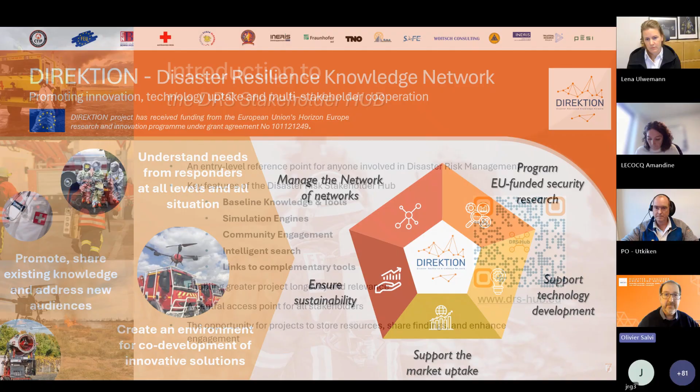This webinar is also organized in the framework of the Disaster Risk Stakeholder Hub, which is an initiative that consolidates results from different projects in the field of disaster risk management. You can access this platform with this QR code and this web address.

So the idea of this DRS Hub is not only to deal with different projects, but to behave as a cluster and to facilitate the interaction between different projects, to develop synergies and to enable cross-learning and cross-innovation between the different projects.

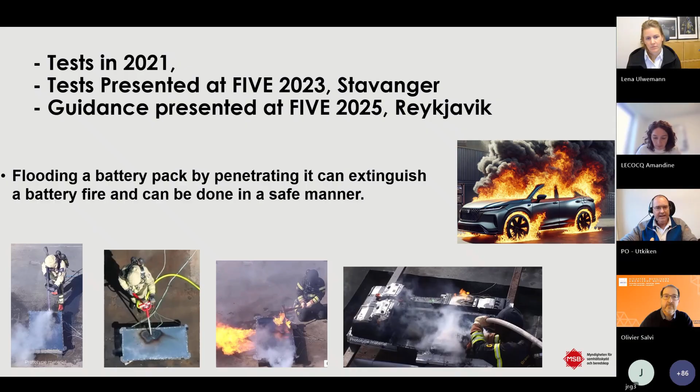Here is the key to what we are talking about. If you look at this, you see thermal runaway for a couple of seconds, and then it's a regular fire. During this process, we heat the adjacent cells. By getting water into the battery pack, we cool the cells that are on fire with thermal runaway or fire afterwards, and we cool the adjacent cells. So that is basically the key: get water inside and then cool as much as we can.

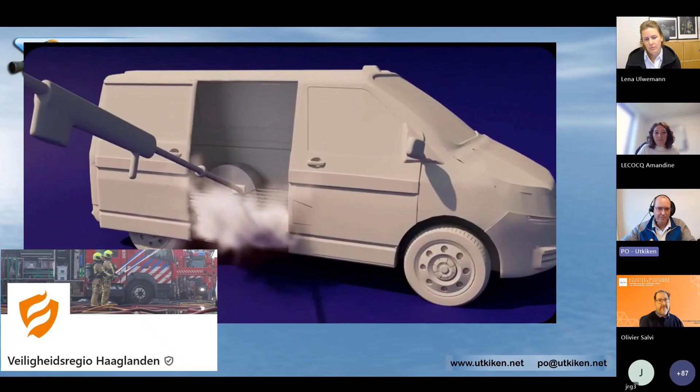This is a clip from a Netherlands fire brigade which illustrates it very well. If we spray water into the battery pack and cut a hole in it, we might start new thermal runaways, like the last red cell you saw there. But since we are at the same time getting water into the battery pack, we are cooling the other cells. So it doesn't really matter that we get a new thermal runaway or several new ones, because the water will do what it's designed for.

After our test, we have seen tests in the Netherlands last year that were successful. The NIPV did some testing there, burned two EVs, and in both cases it was a success. And in France in June, we saw SDIS 91 do their testing, also successful. So we're starting to get evidence that this works, and it will also keep the batteries extinguished most of the time. We don't have immediate reignitions. There are certain times in the process where it's more likely, but overall it's been working very well.

In Sweden, we have some real-world operations. Here we had a vehicle with a thermal runaway in the battery pack, extinguished with a fog nail - I'm going to get back to that. The second one was a vehicle put out with a cutting extinguisher, and then we had an electric bus that was also put out with a fog nail. Talking from the MSB perspective, the Swedish Civil Contingencies Agency, the fog nail is not a recommended tool, so this was done not following the recommendations. But what we saw was that we got water inside the battery pack and it worked.

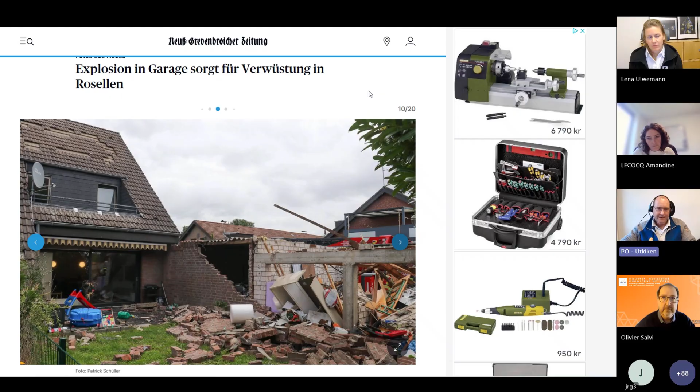Then I'm going to talk a little bit about explosions, because I think that's the largest hazard we have to navigate through or around. We have all seen those pictures. This was an explosion in a vehicle where the garage roof was blown away, the walls were blown away. Then we have different levels of this. This is also something you've all seen, the Jeep on the fire station that blew the roof up in the air due to a gas explosion.

What this gives us is that we have to navigate all those different events. It's not always super dangerous, and we can have a fire in a battery pack where we have the white gases, the smoke as I call it, but we might be able to do something about it. Our thoughts here is to handle it like a gas leak. If you have a flaming thermal runaway, then it's much better from an explosion perspective than if you have a smoking thermal runaway. And the firefighters have a lot of tools already in the toolbox if we think of it as a gas leak of a combustible gas.

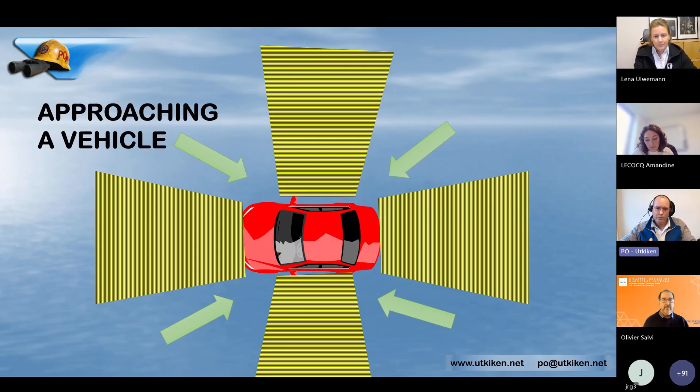The other example is this one that I just showed you from Sweden, where they used a tool to break the window, wait for a while, because that seems to be like with a regular backdraft, that it takes a while for the oxygen to get into the compartment, and then we have the ignition.

And if we now want to get water into the battery pack, when can we expect a result? Because that will also vary. It will vary because of the tilt angle of the vehicle, if we are in the correct compartment, because we can have vehicles with several compartments, and there the rescue sheets are very valuable. And if we have large holes in the bottom of the battery pack, like Tesla for example, where their battery pack bottoms can burn away, if we have that kind of construction, then this method will not work.

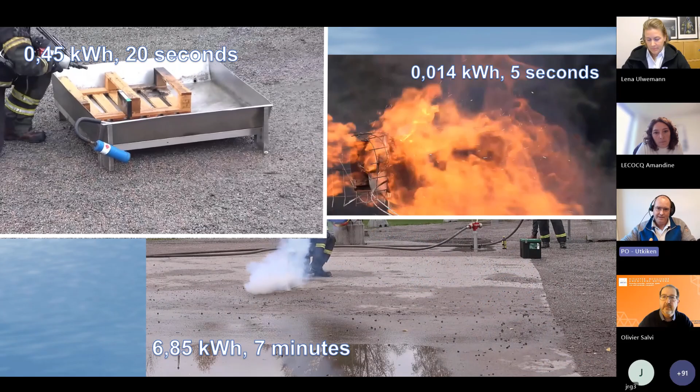So we need to be aware that it's not a single solution for everything. Also, cell and module size matters. This is what I'm talking about here. We have 3 different sizes. The smallest size, they have a thermal runaway for 5 seconds. So if I get water inside the battery pack, it will be very fast for the cooling to work.

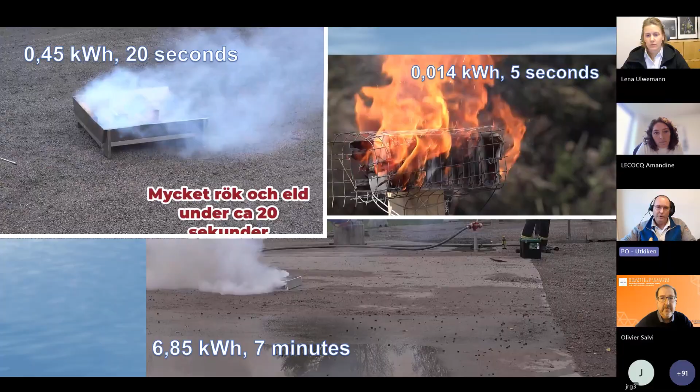The upper left, we have a 0.45 kilowatt hour battery cell, and that thermal runaway will go for 20 seconds. And in the bottom, we have a Volkswagen battery module with pouch cells, which will go through the module for 7 minutes. Since we are talking about cooling the adjacent cells, we can't expect a result from the cooling until we have the original thermal runaway burned through.

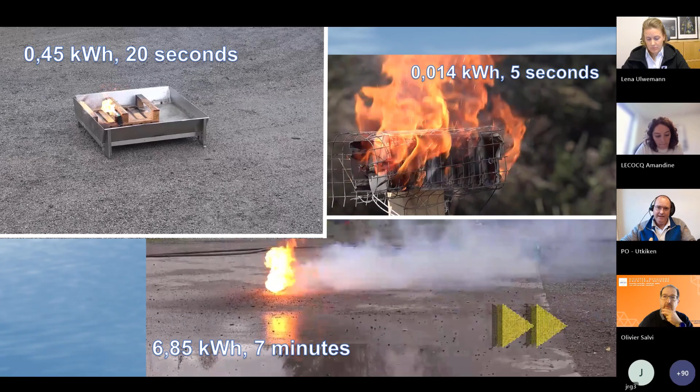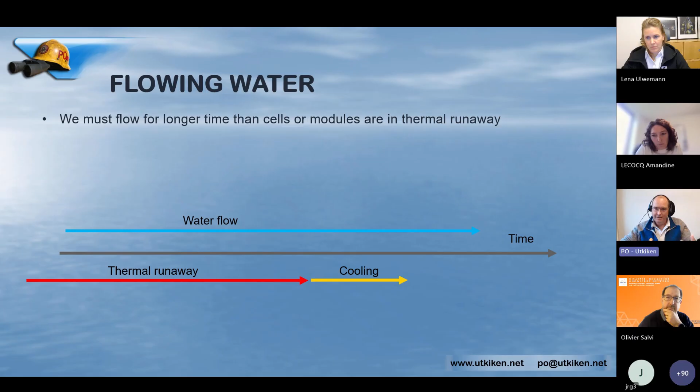And what that gives us is a timeline for how we must flow water. So we must flow water long enough to stop the thermal runaway. We need additional cooling time and some extra time. This, I think, can be frustrating for the firefighters, because we can stand spraying water for like 7, 8, 9 minutes, and we don't see any results because the thermal runaway is still going on in the original cell. But then we need to be patient with it.

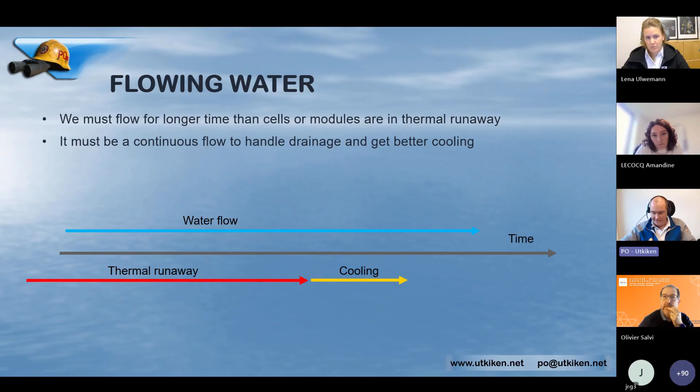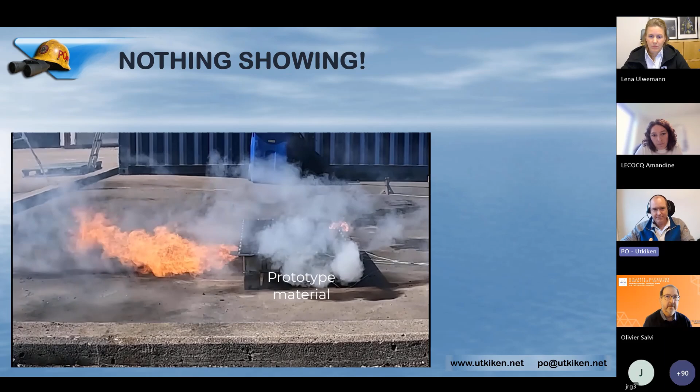And finally, I would like to show this video here. If this is what we have when the caller calls to the dispatch center, they say we have lots of flames, we have a lot of smoke. Battery packs today are very well designed. They are designed not to burn and to have a slow fire spread. This means that what we're looking at now could be what the fire service sees when they arrive, and that is nothing. So we need to be aware of that and use that time wisely to prepare for what could happen when we start to get this fire again.

And also talking about good design, they are designed to be able to handle a single thermal runaway, and sometimes that works. If that is the case, then we should not make any holes in the battery pack, because then we have a self-contained battery pack fire.

And with that, I would like to go to my last picture. Let me see if I can do that here. Here we go. So that was what I was going to talk about today.

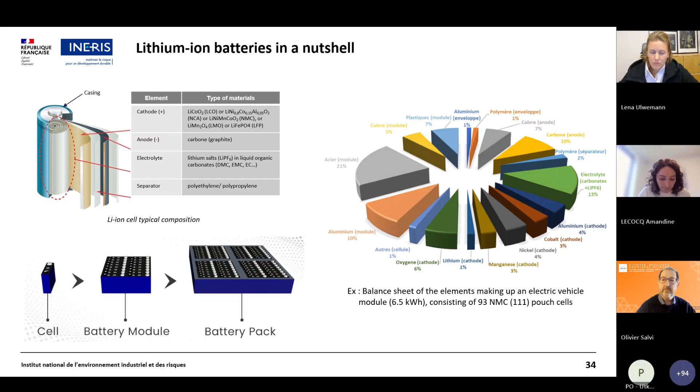As you know, lithium-ion batteries are prone to thermal runaway phenomena. This thermal runaway can occur when the battery is subjected to external aggressions such as mechanical, electrical, dysfunctional, or thermal aggression. It can also occur due to internal factors such as manufacturing or design defects.

The thermal runaway of one cell can propagate to adjacent cells, to the complete module, complete pack or rack, or even to the complete vehicle or complete system.

Different effects can occur during thermal runaway. It can lead to gas and particle release, fire, explosion, as was shown by PO, as well as projections of incandescent materials or small cells.

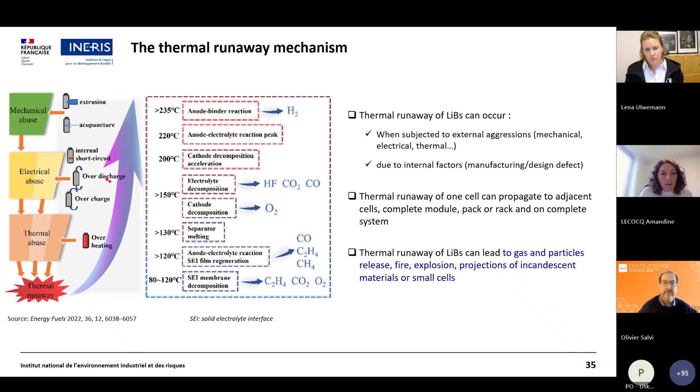In some specific cases, projections can also occur, also called the missile effect. These projections are mainly seen during fires in storage or recycling plants, or in some specific cases of violent crashes of electric vehicles. It's mainly due to the small cells present in these types of packs on different vehicles or in bulk storage.

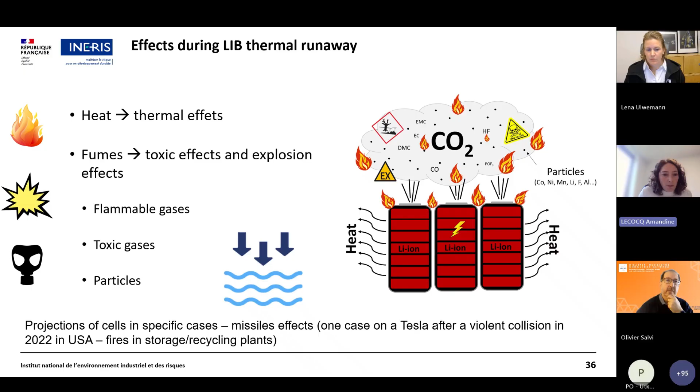Lithium-ion batteries are involved in many accidents and applications, from the smallest like smartphones or scooters, through medium like cars, to the largest like battery energy storage systems, BESS, and recycling facilities. Here are some examples and pictures of accidents that occurred across these many applications.

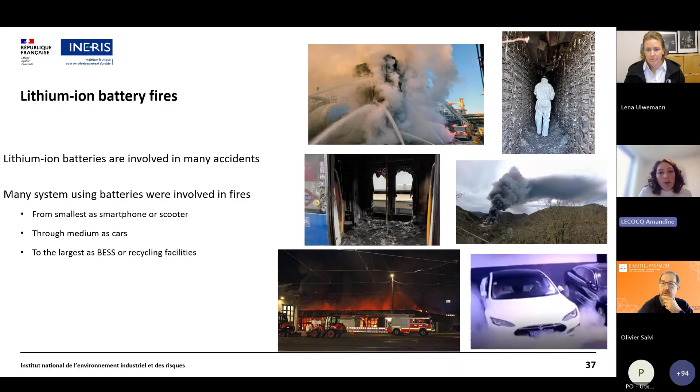Here is an example of an accident that occurred on a BESS in the south of France in 2020. It was a mixed electrochemistry of lithium iron phosphate and supercapacitor. It was a new container being put into service. A fire occurred in a BESS container that contained batteries, and the difficulty in this case was that these BESS containers were stacked.

There was a stacking of this container above another one, which posed difficulty of access for firefighting services. Also, at this site there was a lack of nearby water points, so it was difficult to extinguish the fire. The container was equipped with an extinguishing agent based on phosphate salt, but it was inefficient to tackle the fire.

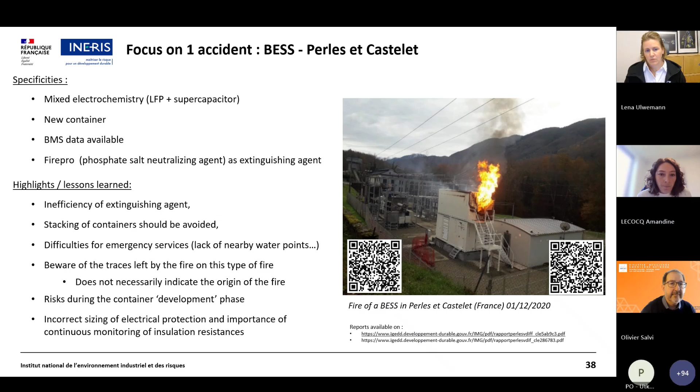So at Ineris, we have different safety platforms to characterize lithium-ion battery thermal runaway.

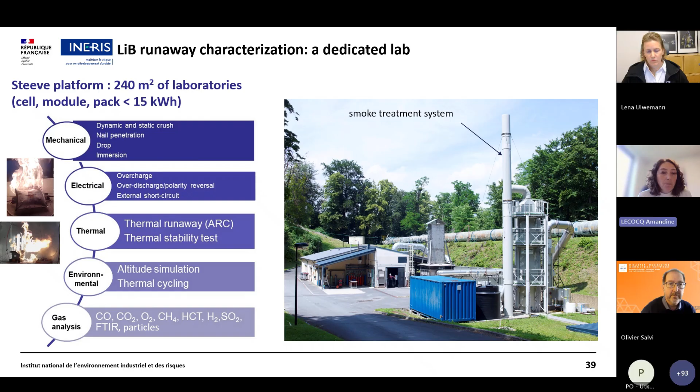Here is the first platform, called the Steeve platform. In this platform, we can perform different types of tests: mechanical abuse test, electrical abuse test, and thermal stability test on batteries.

to characterize the effects and also to analyze the gases emitted during the abuse test, as well as particle analysis. The second platform is the fire platform, used also to perform fire tests, but also mechanical and electrical

tests on larger batteries, since the test chamber is of higher size. For example, we have a very large fire safety chamber of 1,000 cubic meters that is used to perform tests at pack level, electric vehicle level, and also system level.

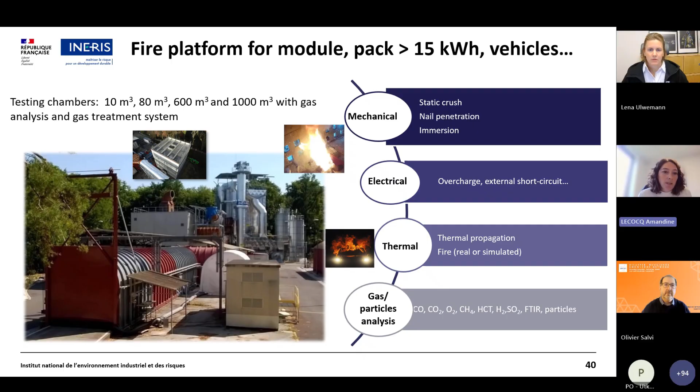And in this platform, gas analysis and particle analysis are also performed. So we have different types of measurements, such as physical measurements, gas generation characterization, and online gas composition measurements, including smoke and particles. We also perform water sampling and composition analysis. So I will show you some examples of results we have.

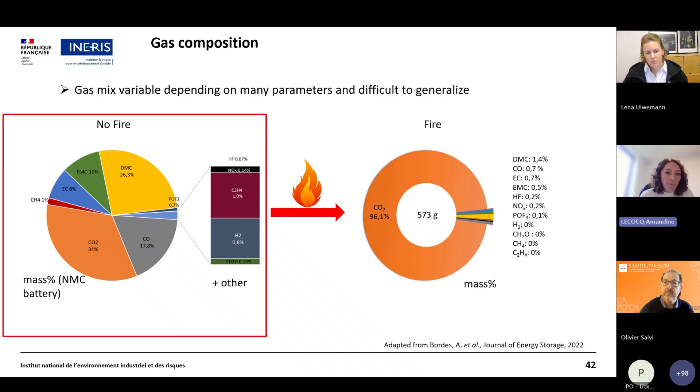Here is the gas composition of two cases. On the right is the typical composition of a battery fire when we have little fume generation, so it's mainly fire. In this case, the main gas produced is CO2, at more than 90%. On the left is a case where we have only fumes, and you can see that the composition is completely different, with a lower amount of CO2 and a higher amount of flammable gases, as represented in this graph.

In the case of fumes, we have highly flammable gases such as hydrogen, methane, and ethylene. Also both toxic and flammable gases such as carbon monoxide and carbonates, which are the solvents used in the battery. And also highly toxic gases such as formaldehyde and HF, and in some cases POF3, which is also toxic.

In this table is the report of the explosivity limit of the flammable gases and the toxicity threshold of toxic gases we can find in the fumes during thermal runaway of a lithium-ion battery.

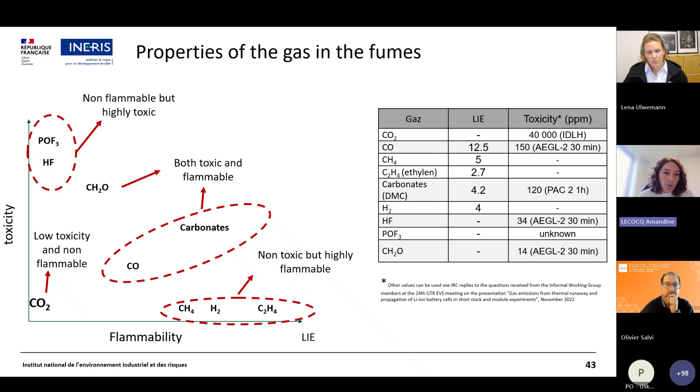The combustion is higher with NMC chemistry, so we have a higher amount of CO2 and CO.

Whereas with LFP, it's mainly vaporization of the solvent that is in the battery, so a higher amount of solvent, namely carbonates, are found in the fumes. So there is less combustion, and also fluorinated species are quantified in a higher amount for LFP, because in LFP there is generally a higher quantity of electrolyte, so more salts that decompose into HF.

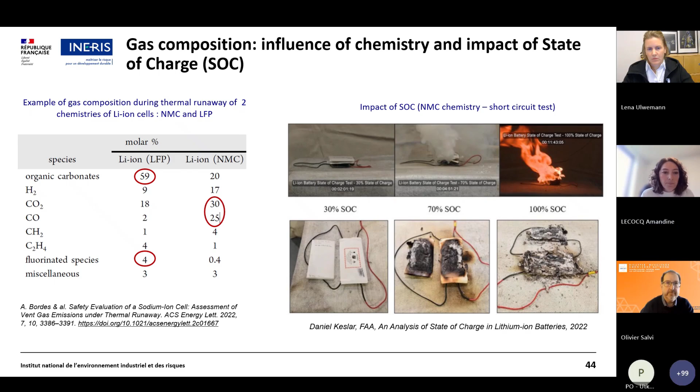So now let's talk about explosion risk. Under certain conditions, for example in underground car parks or garages, accumulation of gases emitted by the thermal runaway of the battery can generate an explosive atmosphere that can lead to an explosion.

Here is a short video showing that an explosion can occur in a garage. It was a hybrid vehicle, and it can be violent in some cases. This explosion can also occur with a small number of lithium-ion cells in thermal runaway condition, and of course it depends on the environment and so on.

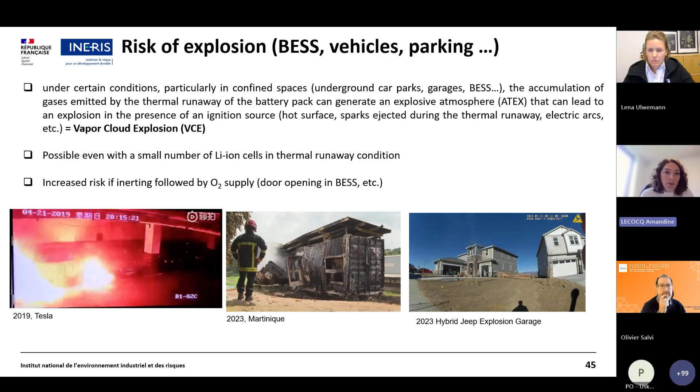Here is another example. One in the center of the picture is an explosion that occurred in a BESS, and on the left is a Tesla, which just shows fumes that rapidly ignite and go on to fire.

So the risk of explosion needs to be taken into account during the extinguishing process. This is the Jeep video already shown by Perola, just to show you that water-based agents may extinguish the flames, reducing the thermal effects, but extinguishing the flames does not mean that the thermal runaway reaction has stopped.

The thermal runaway reaction continues, and flammable gases can be produced, as I've shown you just before. So the risk of an explosion is present and needs to be taken into account. The risk shifts from thermal to explosion.

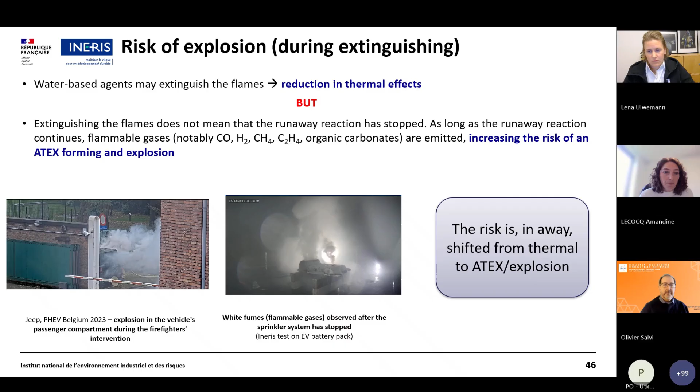So regarding particles emitted in the fumes, the particles are also variable and the nature depends on battery chemistry. The particles can be found in the smoke, but also near the scene of the incident, around the vehicles, or inside the container for BESS applications. And the particulate emissions significantly differ from combustion engine vehicles.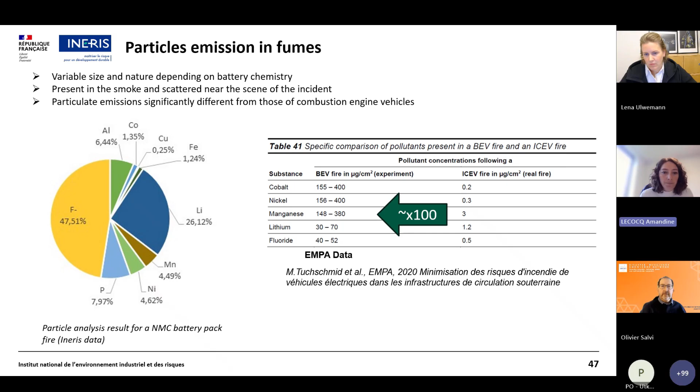Here are some samples taken from firefighters' clothing before and after an extinguishing test performed at Ineris on an EV battery pack. The lighter bars on the histogram correspond to samples taken before the test, and the darker bars to samples taken after the test. Red colors correspond to sampling on the jacket, and blue on the trousers.

It can be seen that contamination of firefighters' clothing is observed with metals, the same as found in particles: lithium, aluminium, manganese, cobalt, nickel, and also copper in this case. Fluoride compounds are also detected on the firefighters' clothing, in higher quantity on the upper part, the jacket, compared to the trousers. This means decontamination of the clothing needs to be taken into account and is recommended after responding to lithium-ion battery fires.

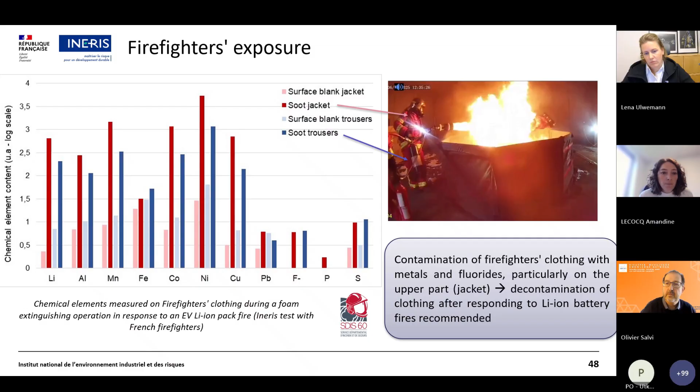Regarding water runoff contamination, there are different strategies to tackle a fire. The first one is external cooling and smoke abatement of the fumes. In this case, the water runoff has shown some contamination with cobalt, manganese, nickel, and lithium, as shown in the water runoff composition after intervention.

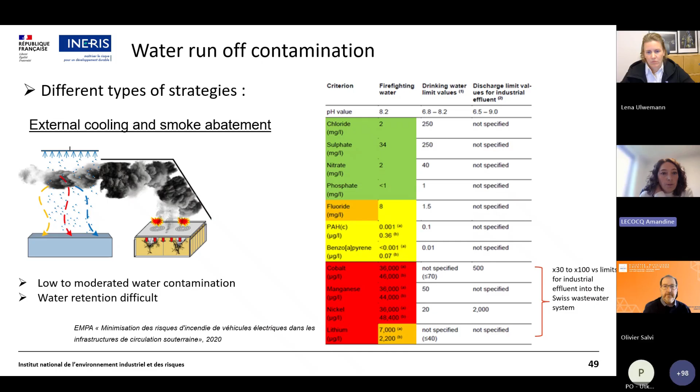The other possibility is battery immersion or electric vehicle immersion. In this case, the same components are found in the water.

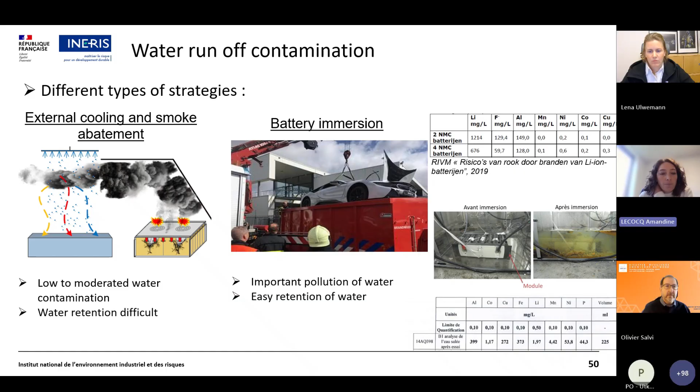The last one we studied is direct contact of water, where water is directly applied to the battery fire. Here are the results of some analysis we performed recently on this water after testing. Different types of tests were done. A sprinkler test, where we set a fire on a lithium-ion battery pack and triggered the sprinkler system on it.

We also performed a medium density foam test, shown in the picture two slides before with the firefighting intervention, and the last one, in green, is a high density foam test. We analyzed this water, and you can see that it is contaminated with metals: nickel, manganese, cobalt, lithium, aluminium, and also the presence of fluoride.

For the foam tests, we observed the presence of sodium and sulfur at a higher quantity for one of them, coming from emulsifiers used in the test. So it's necessary to take into account the potential risk to the environment from water runoff in lithium-ion battery fires. In some cases, we can also quantify organic carbonates in the water. It was not the case in this last test, but we observed this in a previous test.

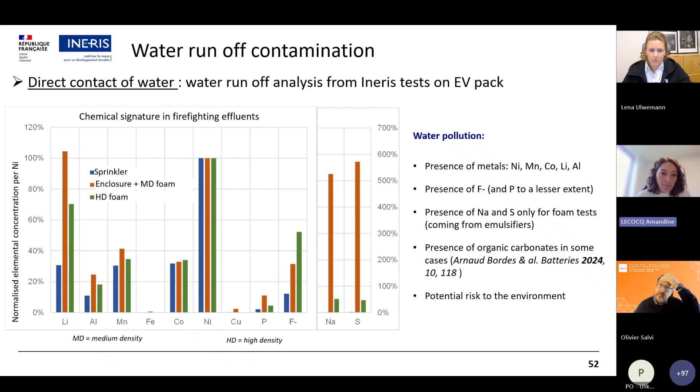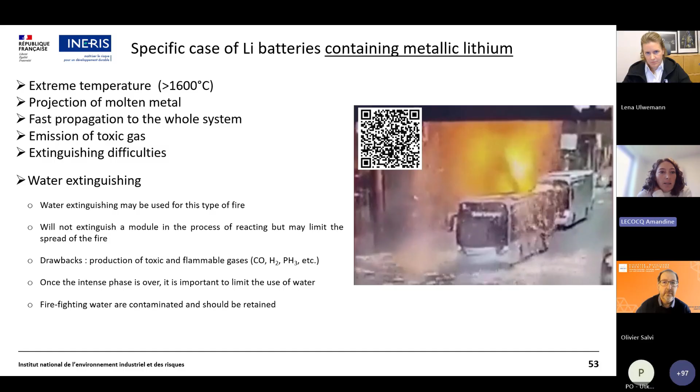So here is another case. Before, I talked about lithium-ion batteries, but there exists another type of battery that contains lithium metal - not lithium-ion batteries, but lithium metal polymer batteries, or batteries containing lithium metal. It's a different technology, and in this case the reaction is a little different, with higher temperatures reached, superior to 1600 degrees C. We'll see in this video the projection of molten metal and a fast propagation to the whole system.

This was an electric bus in Paris, and here it's a lithium metal polymer battery. You can see the projection of lithium metal at several meters from the bus, with very high and hot flames.

So here it's a complete fire of the bus. In this case, it's really a fast combustion, and it can pose some difficulties to extinguish.

However, we performed some tests at INERIS on this technology. These tests have shown that water may be used for this type of fire, but it didn't extinguish the module under thermal runaway. It can just limit the spread of the fire, but it produced toxic and flammable gases. In this case, we observed a phosphine emission during the extinguishing of the fire, which is highly toxic. So it's important to limit the use of water on this type of technology.

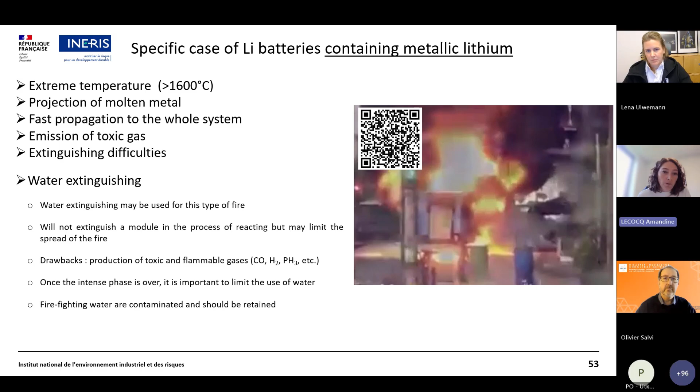So to conclude, regarding lithium-ion batteries, during thermal runaway, fumes contain both toxic gas and particles. Fumes might be flammable and also contain HF.

During extinguishing process, be careful of the shift from thermal to explosion risk. The clothing of firefighters can be contaminated by chemical elements specific to batteries, such as heavy metals and fluoride. And runoff water can be contaminated with metals and electrolyte solvents. So retention is recommended.

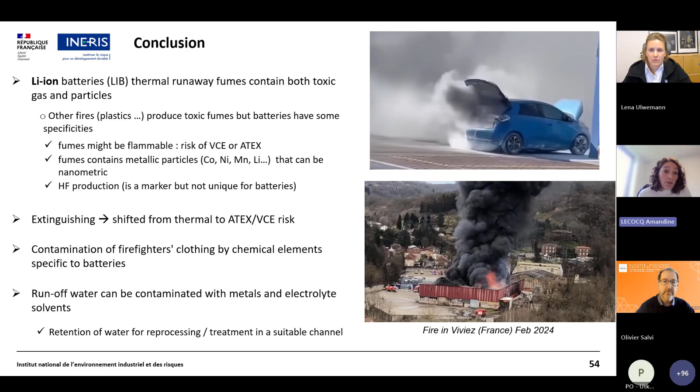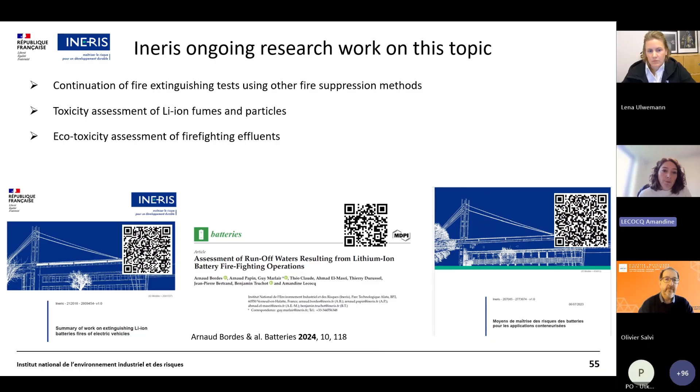So here is just an overview of ongoing research on this topic. We continue at INERIS to perform some extinguishing tests with other fire suppression methods, and to go deeper into the toxicity assessment of lithium-ion fumes, particles, and ecotoxicity assessment of firefighting effluents. Here are just some reports that can be useful to read. Thank you for your attention.

Thank you very much, Amandine. This has been again very informative, and we better understand that the chemistry of the battery is very important. And depending on the type of battery, there are different types of gas that could be emitted and different kinds of particles.

And also an important aspect is the quantification of the contamination on the garments, on the equipment of the firefighters. I think this is a topic that requires a lot of attention in the future. The cleaning is always a challenge, but it's really important in that case to pay even more attention because of the contamination with heavy metals. So thank you very much.

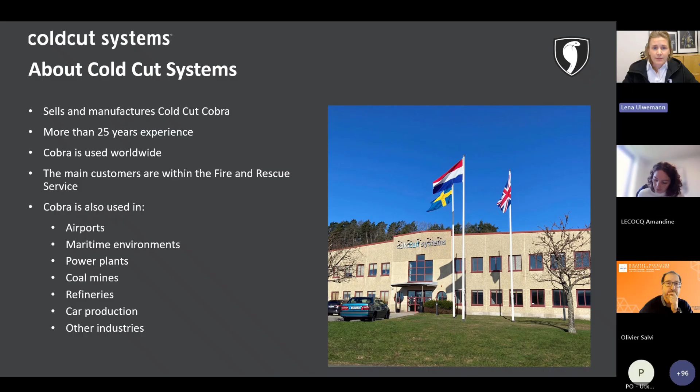So Cobra lets firefighters cool the hot fire gases from a safer position outside the fire compartment. It does so by using an ultra-high pressure water jet, which is mixed with a cutting media called abrasive, and it can cut through any building material in just a few seconds. Once the jet breaks through, it makes only a small hole, which won't let any extra air in, and the fine water mist that follows creates a huge cooling surface area, which makes gas cooling both fast and very efficient.

All this is done using only 60 or 30 liters per minute of water, depending on what system you have.

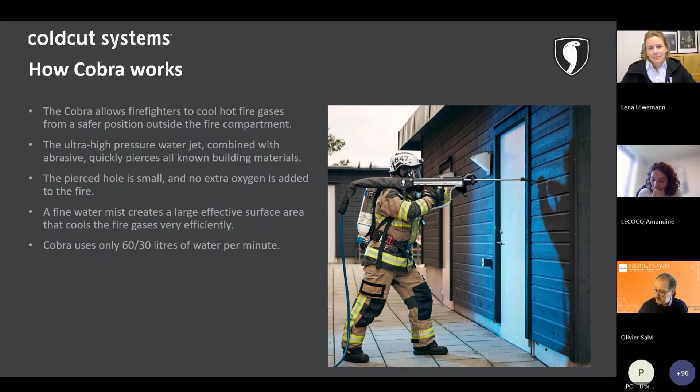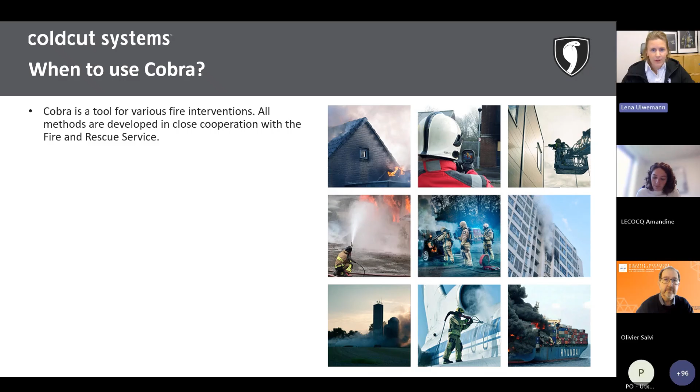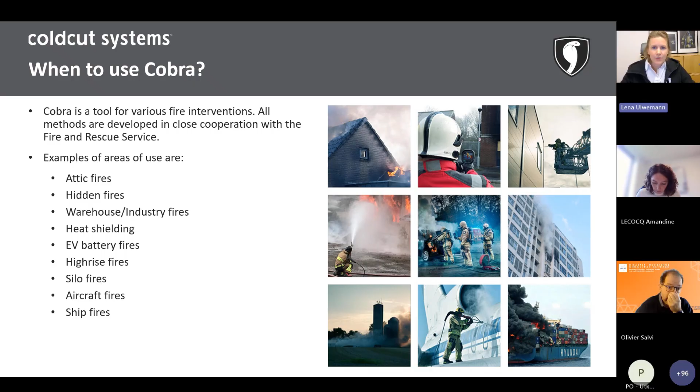So Cobra is not for just one type of fire, and over the years the system has been adapted for many different kinds of incidents, and we always develop the methods together with fire and rescue services. Examples of use are hidden fires, attic fires, industrial fires, and more recently, EV battery fires. And because Cobra is used in so many different types of fires, it's not just about having the right tool, it's about knowing how to use it efficiently in each situation.

And that's where Cold Cut Academy comes in, where we develop the methods, tactics, and conduct training for using Cobra. We provide courses ranging from basic operator courses to instructor courses, refresher courses, and more targeted courses like incident commander course, and of course the new Cobra and EV battery fire course, which focuses on one of the most complex challenges firefighters face today.

So with that said, let's look at the development of this method of handling the propagation in EV fires. We had quite a journey to develop this method, which would not be possible without help from experts in the field, fire and rescue services, car manufacturers, and national contingency agencies.

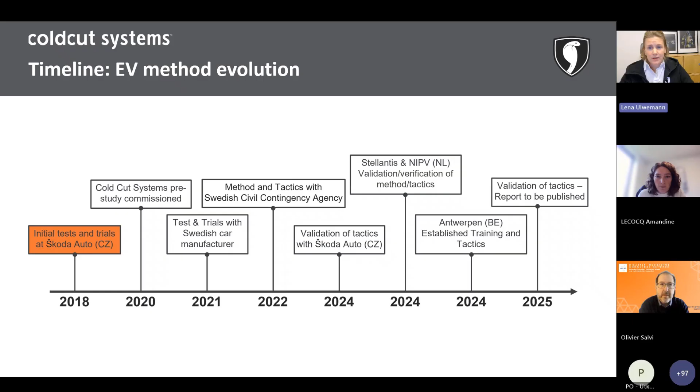During 2021, we were carrying out tests on extinguishing battery packs with Cobra, and we had very positive results. Overall, the project showed that it is possible to stop propagation in a battery pack by using internal cooling with water.

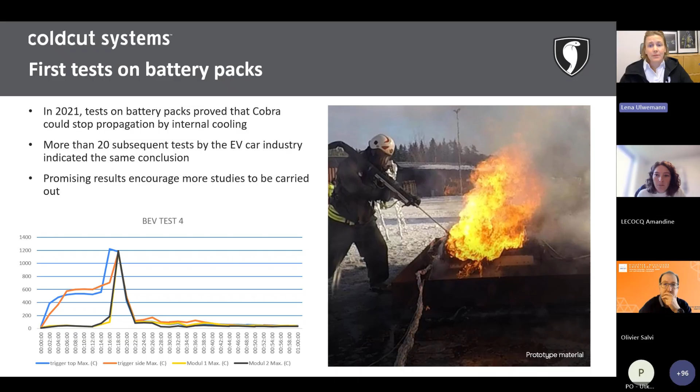Though we had not figured out a method quite yet, so more tests had to be done to develop a feasible method that could be recommended as a generic method for fire and rescue services to access and extinguish a propagating, or stop a propagating, lithium-ion battery in a vehicle.

So a little bit of repetition from what Per-Ola said. The Swedish Civil Contingencies Agency initiated a project to create a method for handling propagating batteries, and also to answer a lot of questions about risks and working environment for firefighters.

So we had the facts. Scientific studies confirmed that the only way to stop a propagating lithium-ion battery was to get water inside, or any available cooling media inside the battery pack, and cool the modules.

But the question remained: how do you get inside the battery pack? For this, all fire and rescue services need a proven, repeatable method and a tool that could do the job.

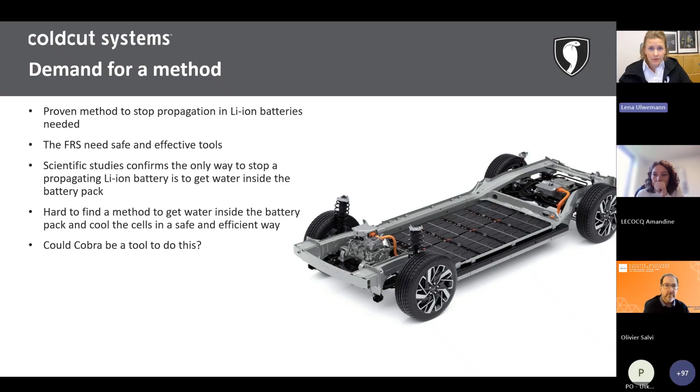That project was a joint effort with battery experts, car manufacturers, and tool developers, including us, Cold Cut Systems, with the main focus to find a working method on how to cool the batteries with fresh water only, since that had already been confirmed in earlier studies that was the key to stopping the propagation.

So with the goal of actually defining a method that could be used by firefighters based on tools already accessible for fire and rescue services, this result, as Per-Ola said, was demonstrated in a demonstration report and one guidance document on how to handle thermal events.

These results were then shared with Skoda Auto, and they carried out more tests on their own, at battery pack level and full-scale tests, and in all scenarios, the fire propagation was stopped.

The phase after that was in the Netherlands, where the Dutch Institute NIPV carried out similar tests and trials together with Stellantis, where we contributed by sharing experiences and observations and trained the crews on the method. This also resulted in a method and a guidance.

Ever since, we know of several tests done by other organizations, and most recently, as Per-Ola mentioned as well, the SIS in France — we're waiting for their report coming shortly — and also the NFPA in the United States, where we're waiting for a final report to be released in December, as I know it.

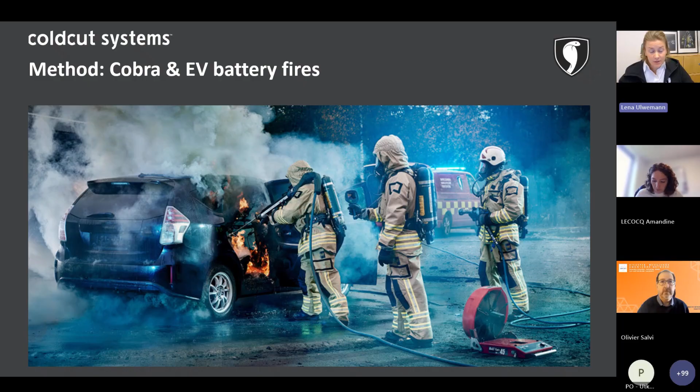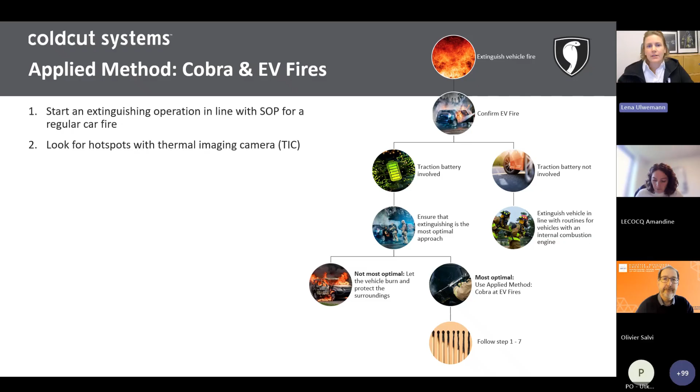What we're going to do first is actually start the operation by extinguishing it as a normal car fire in line with the standard operating procedures. By then we can confirm if it's an EV fire or not. If it's an EV fire where the traction battery is not involved, we can continue extinguishing it as a normal car fire, because the traction battery will get involved eventually.

If the traction battery is involved, we consider doing an intervention or not, depending on the situation and the scenario. Where is the car placed? Is it in an underground garage or an open parking lot?

If we decide on continuing or doing an intervention, we're going to start by extinguishing the flames. We'll look for hotspots with our thermal imaging camera, and deploy Cobra close to the hotspot, not necessarily at the hotspot, but to establish an internal flow of water to cool the battery cells.

We'll continue to monitor this with the thermal imaging camera, and we might have to redeploy Cobra if nothing happens. As Per-Ola also said earlier, the modules burn for differing lengths of time, so patience is key to success here.

Our target is to get below 50 degrees Celsius over time so that it's stabilized, and we'll monitor the temperature for a minimum of 15 minutes or however long we need. If the temperature rises, we redeploy Cobra and do it all over again. We're also going to extinguish any remaining fires in the vehicle's interior and exterior with a regular firefighting branch.

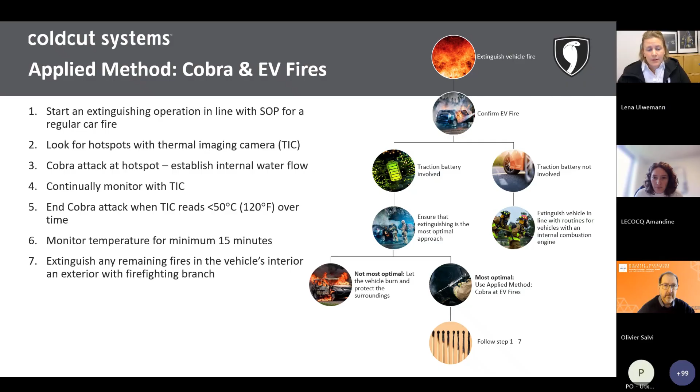I'm going to show a short video of this, and afterwards I'll quickly share some case studies on real interventions.

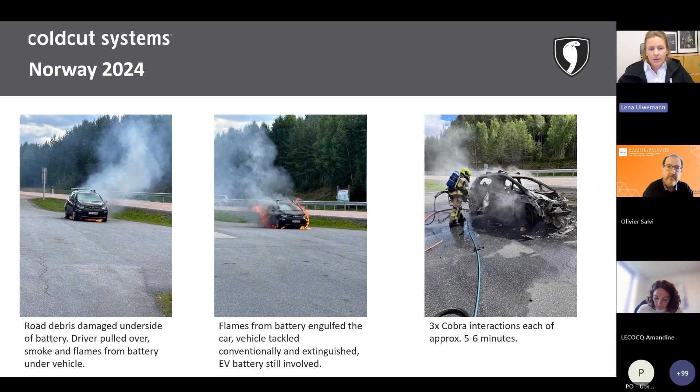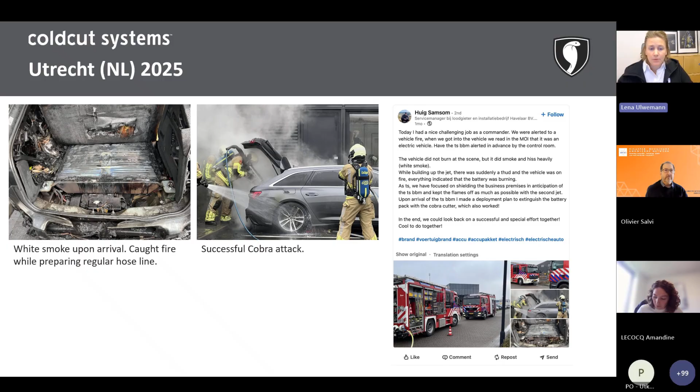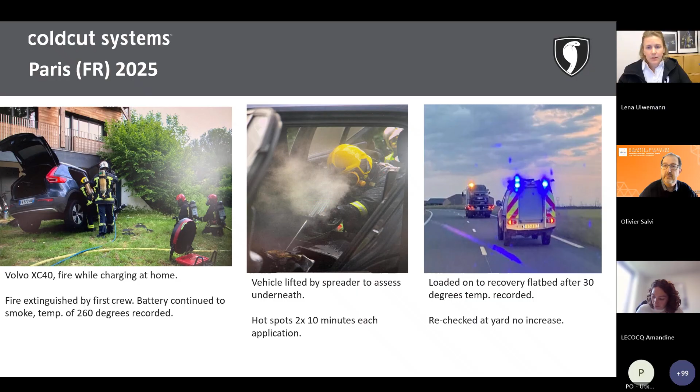300 liters of water were used in that one.

In Tempe, they were called to a Tesla fire burning, with flames coming out from underneath. They deployed Cobra for approximately 10 minutes, also using 300 liters of water, to stop the propagation.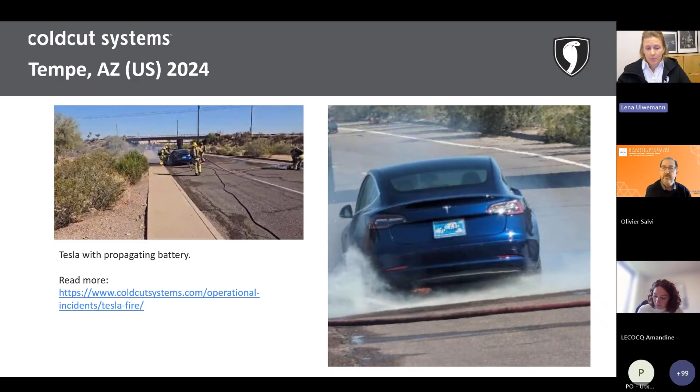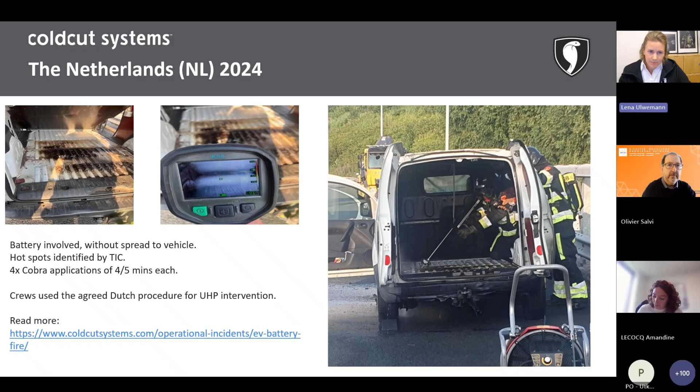One more from the Netherlands, my last one - this is the department in Rotterdam, who answered a call on an EV fire that had also hit debris from the road, putting the battery in thermal runaway. Again the driver pulled over, and when the crews arrived, they used the Dutch agreed procedures for handling a propagation in the battery. They deployed Cobra 4 times, 4 minutes each, to flood and cool the battery, resulting in a successful stop of the propagation.

That's me. Thank you.

Thank you so much, Lena, for the introduction of your system developed by Coldcut. Very interesting, also the history of the development of the technology, because it's exactly what we would like to do to support in the DIREKTION project, this co-creation. You started in 2018 with Skoda, had different tests with other companies like Stellantis, and working together you developed a solution that fits the needs, and with the fire brigade also helped minimize the amount of water used, and avoid propagation, especially between different vehicles, if we are in a place where many vehicles are stored together.

Very much thank you. Now I think you can also look at the chat or the Q&A part of the webinar. There are many questions for you, and a colleague from the Netherlands, who was involved probably in the NIPV test, offered to contact him, Theon Payens, probably a person familiar to you.